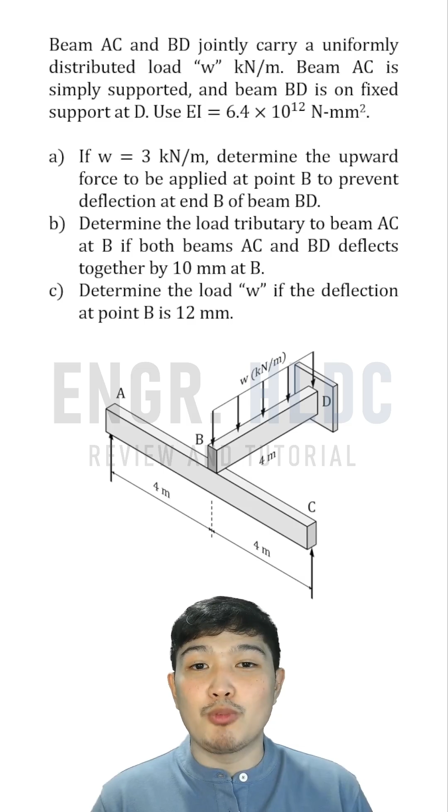The best way to analyze this is to first separate the two beams. Let's draw the free body diagram for each beam. First let us draw the simple beam ABC, and let us draw the cantilever beam BD.

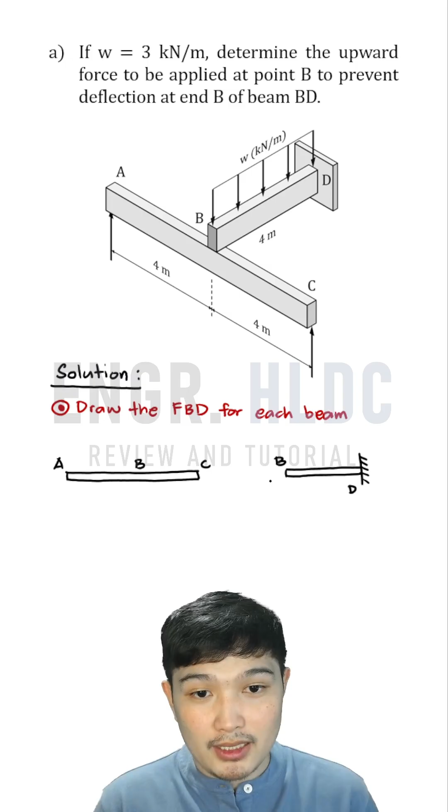Next, let us draw the loads and forces acting on each beam. Let's start with the beam on top, beam BD, which is acted upon by a uniformly distributed load W. At point B, since there is a point of contact between beam AC and beam BD, there will be an interaction force between the two beams.

Since we separated the beams, this force becomes exposed. So what happens here is, if BD were originally just a cantilever beam, point B would fall down. So beam ABC, at point B, will resist and push upward.

So we can place a force here going upward, let's call it RB. Also, since this is a fixed support, we expect three reactions: vertical force, horizontal force, and moment. I'll just show the vertical force and moment since there's no horizontal load on the beam, so there's no horizontal reaction.

Next, remember that this force, going up considering BD, will be transferred to point B considering the simply supported beam AC. The property is that when a load is transferred from one material to another, it has the same magnitude but opposite direction. So at B, the force on beam AC should be directed downward.

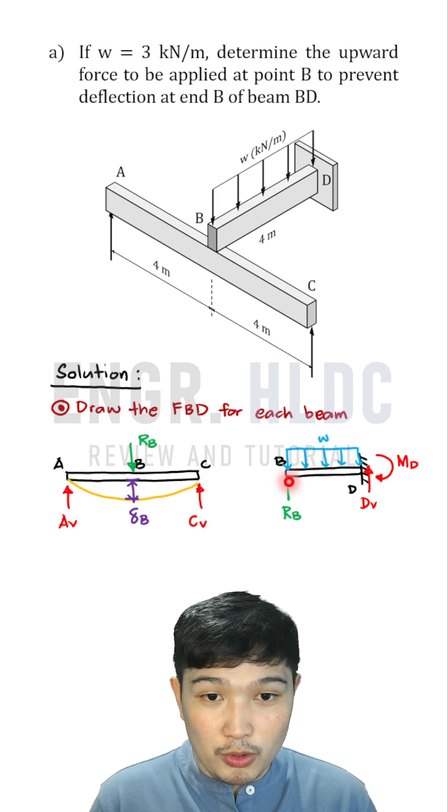For the cantilever beam BD, there is a downward and an upward force, so we may expect the elastic curve to look like this. Considering the same point B, this represents the deflection at B.

The first thing to understand is that since we're talking about the same point B, whatever is the deflection at B here should be the same as the deflection at B there. So let's relate them. Now the question is, how do we compute or calculate the deflection?

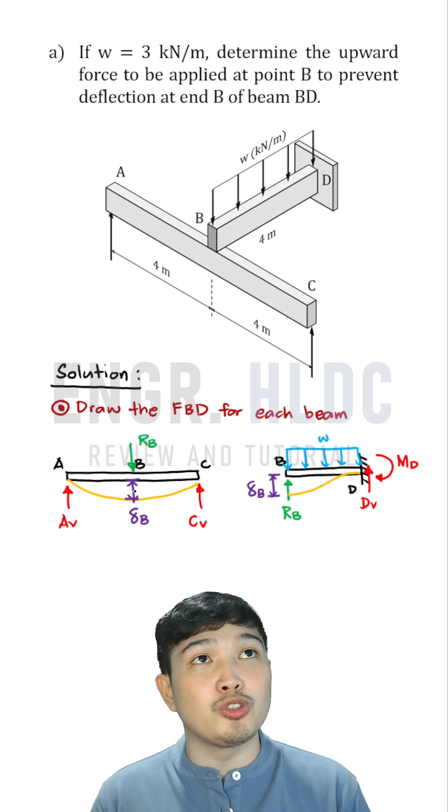So as you can see, the loads are very common: load at midspan, uniformly distributed load, load at the free end. For such cases, para hindi kayo magtagal sa board exam sa pag-solve ng ganitong problem, it is very important na meron kayong mga memorized na mga deflection formula. Memorize nyo dapat yung mga 4 basic load conditions. Recall natin yung mga kilala nating mga deflection formula.

For a simply supported beam, na loadan natin sa gitna, say for example loaded by load P, ito yung ina-assume natin na kanyang deflected shape. Usually na tinatanong ay maximum deflection, and maximum deflection occurs at the midspan. Remember, the deflection at the midspan may be calculated as the value of P multiplied by the length of the simple beam cubed over 48 EI. Memoryado na natin dapat yan.

So what else? Cantilever beam, dapat may mga memoryado ka ring mga formula for cantilever beam. Una, cantilever beam na loaded uniformly by load W, we can expect na magiging ganito ang kanyang deflected shape. Usual na tinatanong dito is yung deflection sa free end kasi siya yung maximum, siya yung critical. Remember, deflection at the free end in a cantilever beam loaded with uniformly distributed load is WL raised to 4 over 8 EI. Ito naman po yung memoryado nating formula.

Another thing, usual din ito na halos ganitong load condition talaga yung lumalabas sa board exam is a cantilever loaded at the free end with a concentrated load P. Almost ganito rin po yung shape niya. Itatanong din, what is the value of the deflection at the free end? For such case naman, ito naman po ang formula: deflection at the free end would be PL cubed over 3 EI.

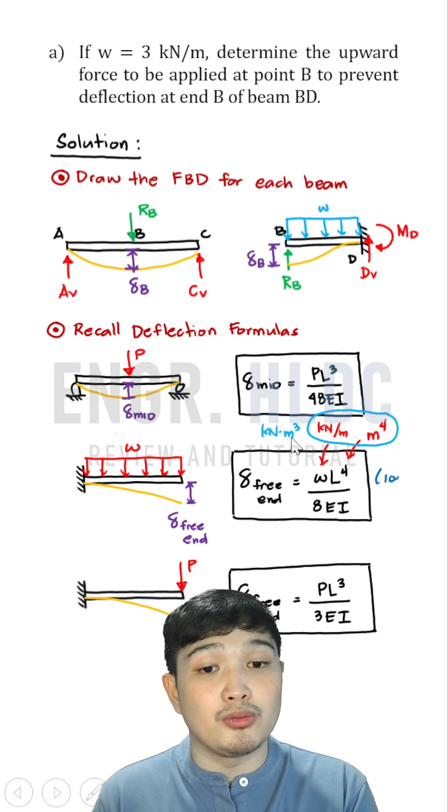Also, dito naman, kapag uniformly distributed load W, usually naka-kilonewton per meter tayo dito, and then yung length in meters. Kung raised to 4, meters raised to 4. Kung kinombine, kilonewton meter cubed. Same lang nung kanina: yung kilonewton to convert to newtons times 1,000, cubic meters para maging millimeters cubed times 1,000 cubed. So basically parang may multiplier kayo ulit sa numerator as 1,000 raised to 4 para yung end unit ng deflection would be in millimeters.

Okay, so apply na natin. May memoryado tayong mga deflection formula, apply natin dito una sa beam ABC. Therefore, the deflection at B for beam AC may be represented as PL cubed over 48 EI. Yung P natin would be represented by RB, yung length natin would be represented, of course, by the length of beam AC. Lagay natin ng subscript, and then cubed, and then over 48, and then EI.

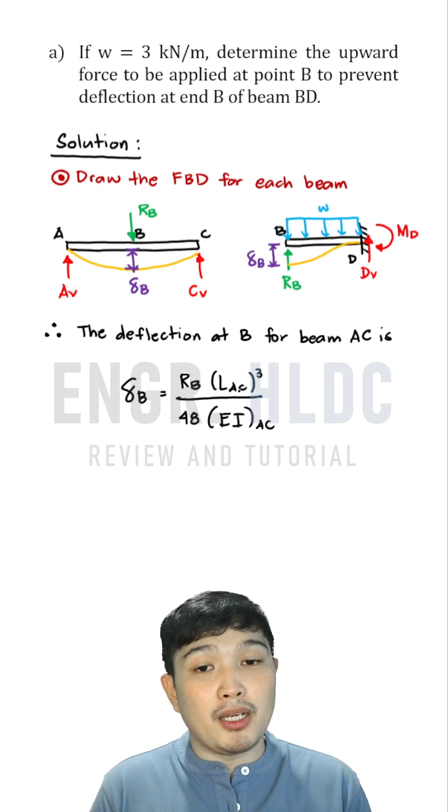Remember class, kung anong beam ang pinag-uusapan, doon din kukunin yung mga properties. So yung EI should be EI for member AC. Yun na, may formula na tayo for the deflection at B considering beam AC. So how about naman for the deflection at B considering naman yung beam BD?

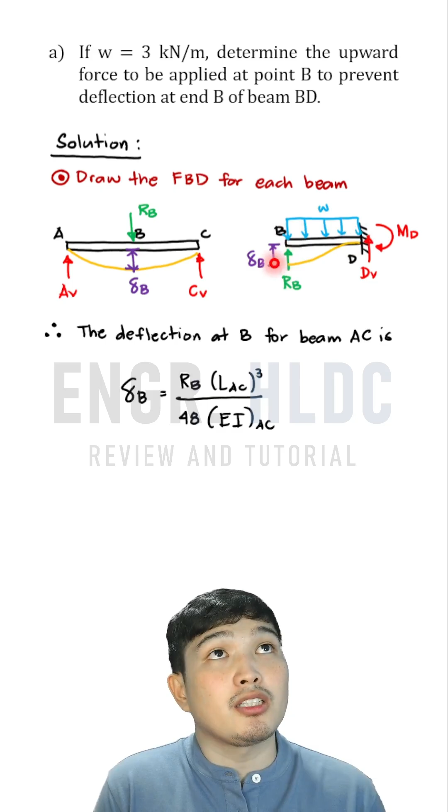Ang dami ng load dyan, no? May distributed, tapos may concentrated load pa. So sa mga ganyang instances, ang pwede naman natin gawin is apply natin ang superposition method.

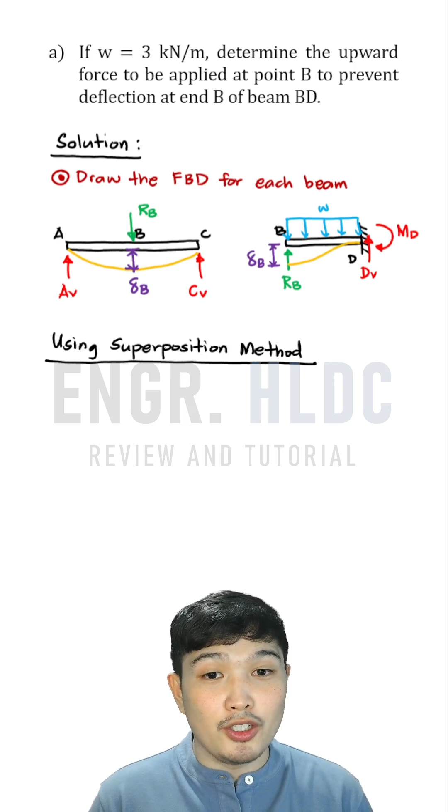So ano po ba yung sinasabi class ng superposition method? Sabi po ng superposition method is that the total deflection at a certain point on a beam may be calculated as the sum of the deflection on the same point caused by the individual loads acting separately.

Ibig sabihin, yung total deflection at A is the sum of the deflection at A considering load 1 plus the deflection at A considering load 2. Okay, yun po yung superposition method.

So applying it sa ating beam BD, okay, considering the combination of the distributed load and the upward concentrated load at the free end, pwede siya i-treat as cantilever beam acted upon by a distributed load, plus a cantilever beam acted upon by a concentrated load at the free end.

Alright? Or, we may write deflection at B, total deflection at B, as the sum of the deflection at B considering load 1, plus the deflection at B considering load 2.

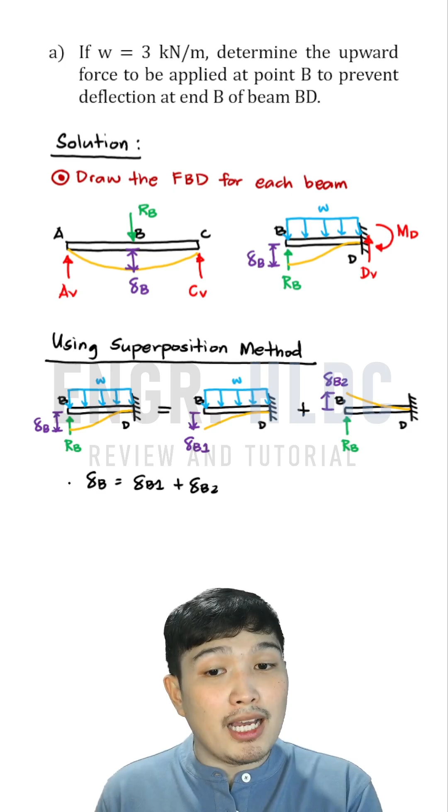Ngayon, remember, pag nag-a-add po tayo, so we have to consider direction. Okay, for a reason na yung deflection kasi, pwede siyang mag-deflect downward, pwedeng mag-deflect upward. Just like yung scenario po natin dito.

So since dito sa previous na ito, sa simply supported beam, ang ginawa natin, downward load will create a downward deflection and ginamit natin doon positive value. So to be consistent, ganoon na lang din dito class. For this beam BD, downward also is considered positive.

Okay. So ayan, therefore the deflection at B for beam BD may be written as, so considering this first figure, anong formula dito at the free end? So that is WL raised to 4 over 8EI.

So, lagay lang natin, making sure na yung length na gagamitin is yung length ng beam BD at yung EI ay yung EI ng beam BD.

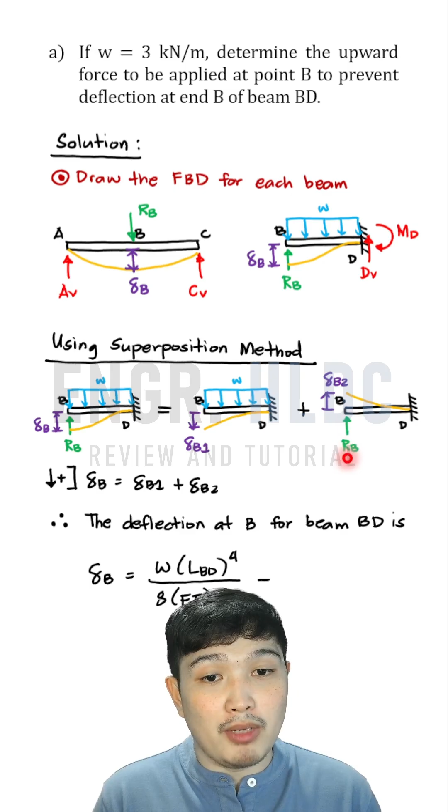Alright? Next, so since upward po dito, so it may be taken as kabawasan sa deflection. So, minus po siya. Okay, at ano yung formula for loaded at the free end? PL cube over 3EI. So, yung P natin would be represented by RB.

Alright? So, that should be something like this. Meron na tayong mga representation ng deflection at B. So, we may now proceed with our calculation.

So start tayo again. Sabi dito guys, for letter A, if W is 3 kN per meter, determine the upward force to be applied at point B to prevent deflection at end B of beam BD.

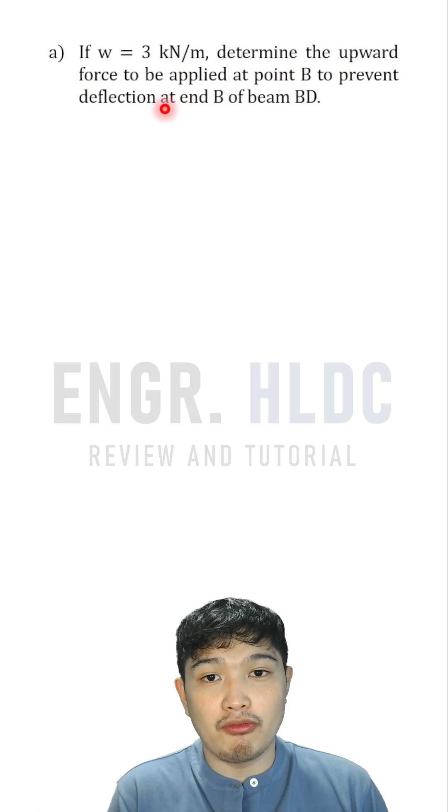So lista muna natin guys yung mga given. We are given with the magnitude nung uniformly distributed load. At binanggit din class na ipe-prevent yung deflection at B. So it means deflection at B should be set to 0.

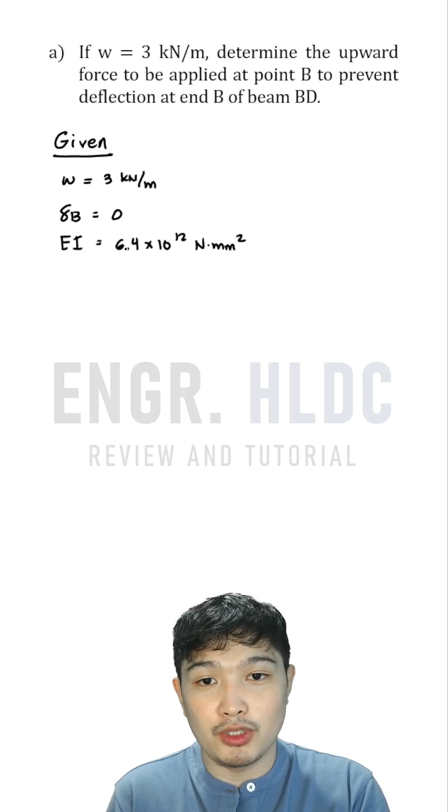At do not forget yung initial na given kanina, yung flexural rigidity nung beam po natin na 6.4 times 10 raised to 12 Newton millimeter squared.

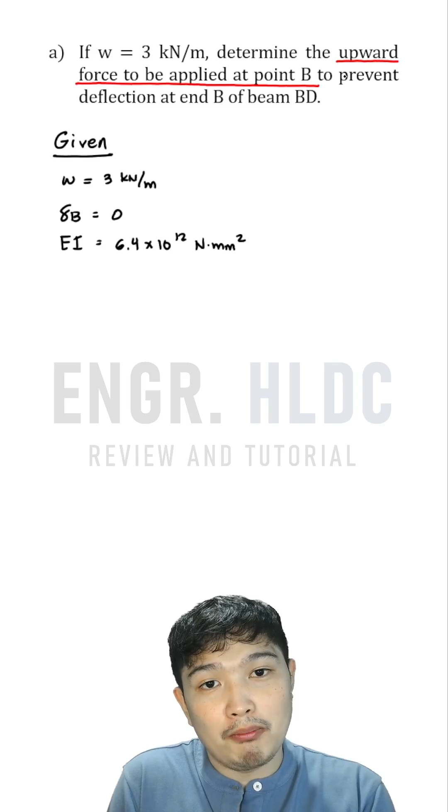Okay, so ang tanong dito guys, ano yung hinahanap? So i-highlight natin class, upward force to be applied at point B. Ano yung upward force po na iyon? So imaginein muna natin class yung initial na mangyayari pag nag-load tayo ng W.

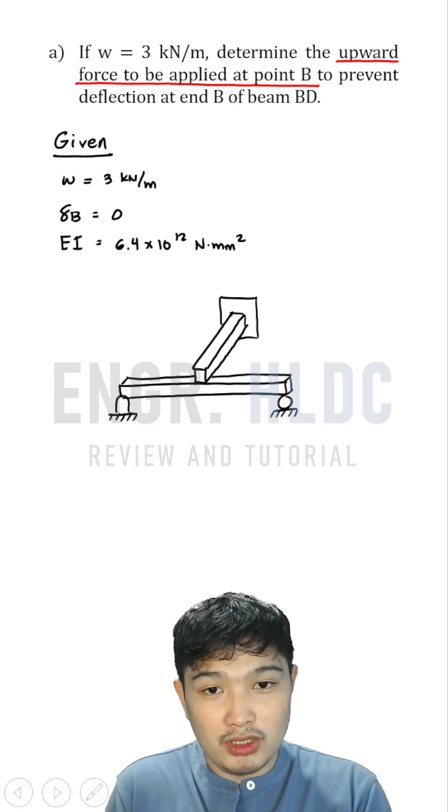So for example, this is our beam BD, the cantilever beam BD, and this is the simply supported beam AC. Initially, let's load it with a uniformly distributed load W. Naturally, since there's a load, the cantilever beam will deflect downward, and then the simply supported beam will follow. Something like that.

So at B, this is the deflection at B. Based on the problem, we need to prevent this deflection. So how can we prevent this deflection at B? There are several ways to eliminate the deflection at B. First way, there should be no load W, since the deflection only happened because of the load. But of course, that's not realistic since the magnitude of W is given.

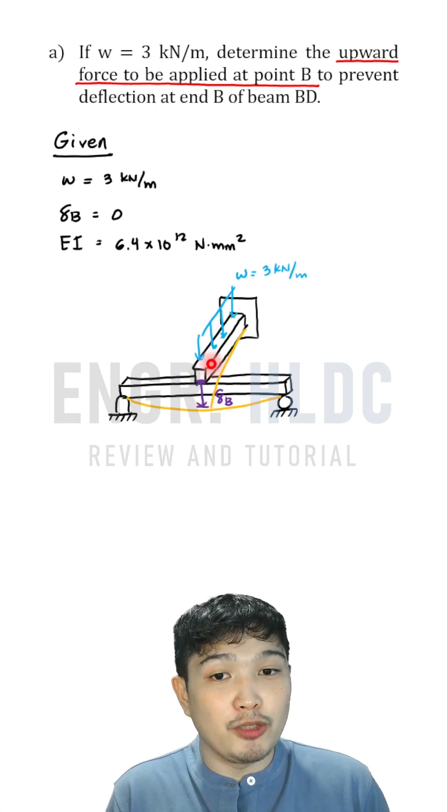So what is the most realistic way to prevent the deflection at B? That is, we apply a counter force to the deflection. We apply an upward force, let's call it P, exactly at B, pushing it upward to prevent the deflection that occurred.

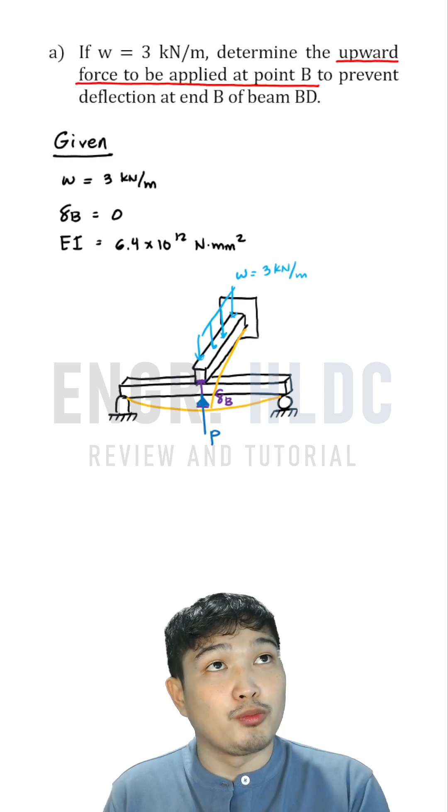So for this question letter A, we now have an additional force P compared to our initial calculation earlier and the formulas we derived for the deflection at B. Remember, this is our figure from earlier, P is not yet present here. Now, what difference will it make if we place P in the middle?

This means for the simply supported beam, our forces will change since we now have P. But for the cantilever beam, since P doesn't directly act on it, we won't see P here since P is only applied at the bottom of the simply supported beam AC. Our purpose is to eliminate the deflection at B, so this becomes the deformed shape, or the elastic curve.

So basically it should become like this, a horizontal line. And then for cantilever beam BD, it should be lifted back up like this, making sure the deflection at B is 0. So to solve for this P, we can only see it in the simply supported beam, so we have to analyze the simply supported beam.

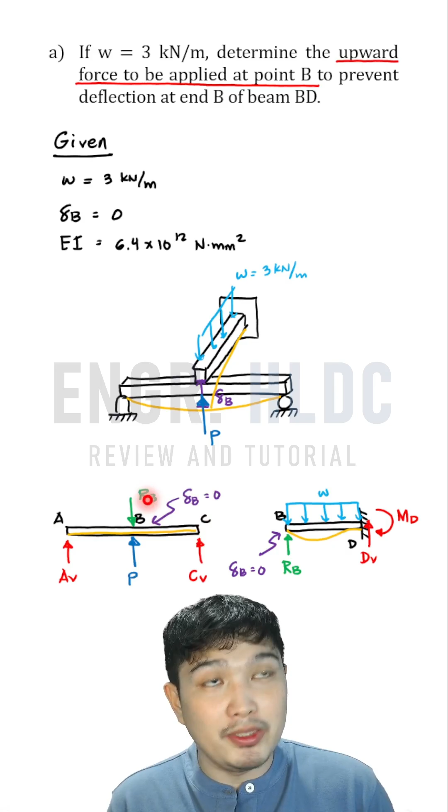However, we do not have the value of RB yet. So what we can do is solve for RB first using this figure on the right. We need to find how much RB is required so that the deflection at B becomes zero, using the equation we developed earlier for the deflection at B, which is this.

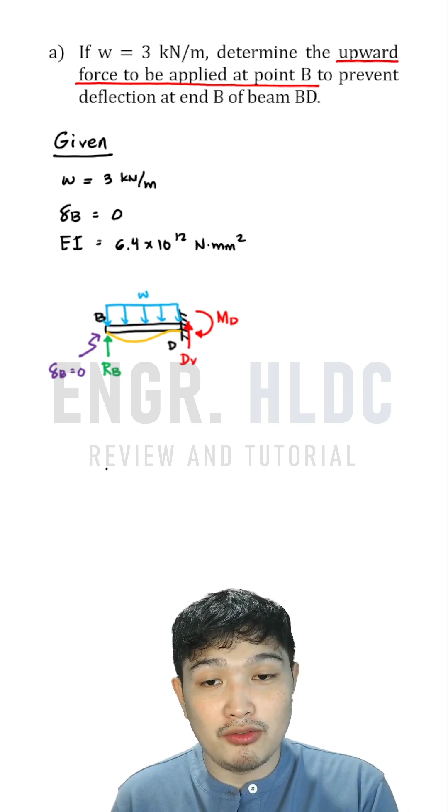Then we simply plug in the given values. First, deflection at B is 0. Next, W amounting to 3 kN per meter. The length of beam BD, which is 4 meters, and don't forget the multiplier of 1,000 raised to 4. For RB, that's our unknown, let's say it's in kilonewtons, and again length of BD is 4 meters. We can also place EI in the denominator, but what I'll do instead...

is multiply both sides by EI, so we can cancel the EI in the denominator, and on the left hand side, EI times 0 is 0. To simplify further, divide both sides by 1,000 raised to 4, so the left hand side remains 0, and the right hand side cancels the 1,000 raised to 4. So we can simplify this as 0 equals 3 times 4 raised to 4 over 8, minus RB times 4 cubed over 3. So we can calculate RB as 4.5 kilonewton.

This is not yet the answer. This is just the interaction between the simply supported beam and the cantilever beam. So let's go to the simply supported beam now. We already have RB here, so now what, sir? Do I need to analyze it again? Not quite, actually.

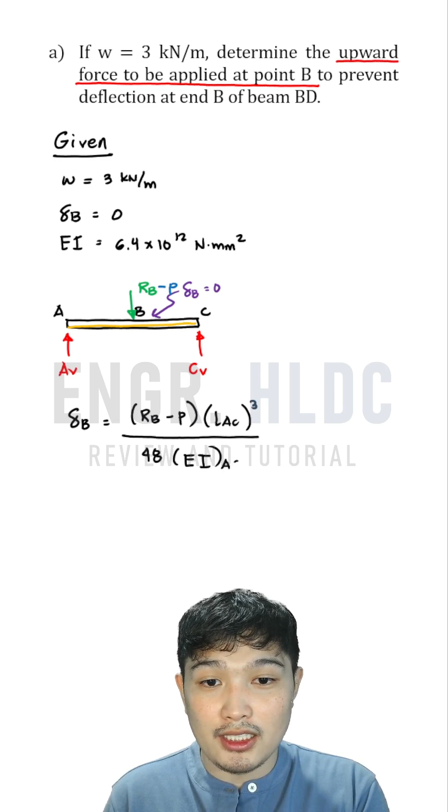So deflection at B is 0. RB we can put as 4.5, and P is unknown. Length of AC, do not forget, is 8, with a multiplier of 1,000 raised to 4. EI, let's put that too: 6.4 times 10 raised to 12. Solving for P, you may use your calculator and the answer should be 4.5 kilonewtons.

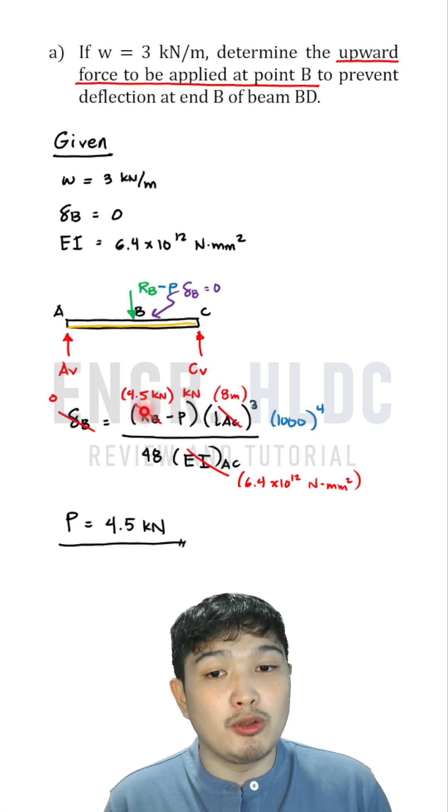Notice, class, you can easily see that P here becomes equal to RB. Because notice this denominator, you can cross multiply it to the 0, so it becomes 0 as well. Then this 8 cubed and the 1,000 raised to 4 can be brought down to the denominator of the left side, so basically it becomes 0. So what's left is 0 equals RB minus P. That means P is equal to RB.

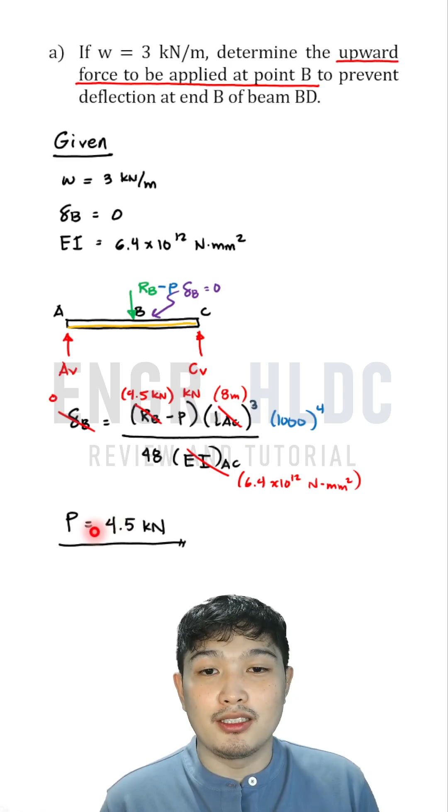Alright, okay, next, letter B. The question asks: determine the load tributary to beam AC at B. So basically, class, what is resting on beam AC at point B? That is again RB, given that beam AC and BD both deflect 10 mm at B.

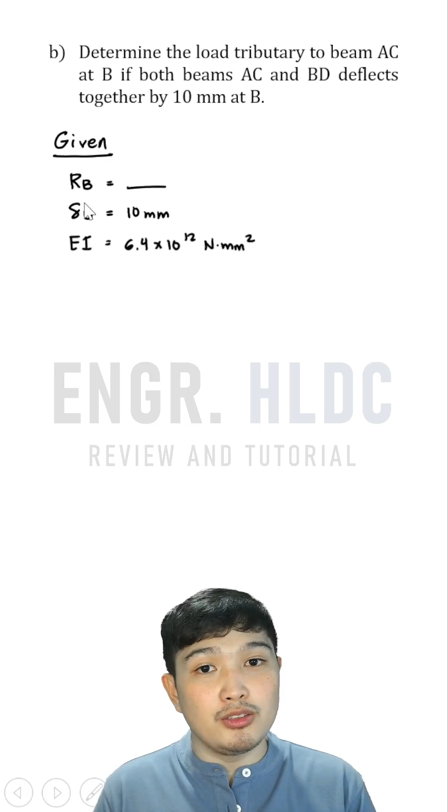So from there, we can say the unknown is RB. We have deflection at B of 10 mm, and don't forget the EI given earlier of 6.4 times 10 raised to 12. So RB is what we're solving for, and the focus here, class, is the simple beam AC, using the formula we derived earlier for the deflection at B for beam AC.

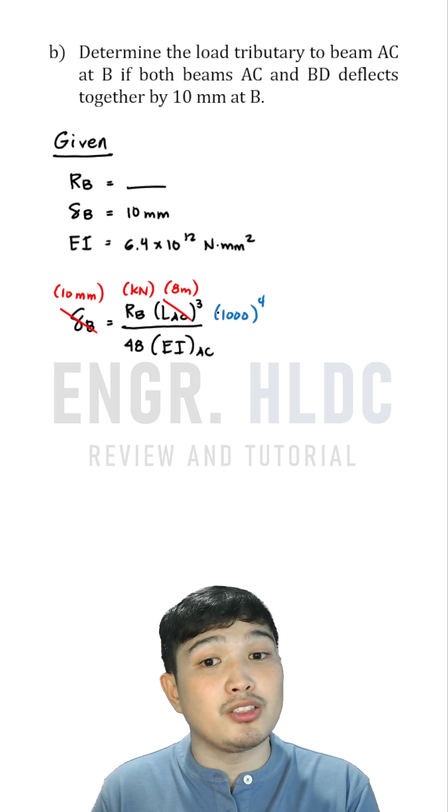So simply substitute: 10 mm, this in kilonewtons, this is the length of AC — don't make a mistake, it's 8 meters — then the multiplier of 1,000 raised to 4. Here we need to write EI since it won't cancel out. So simply use the given parameters and we can easily calculate RB as 6 kilonewtons.

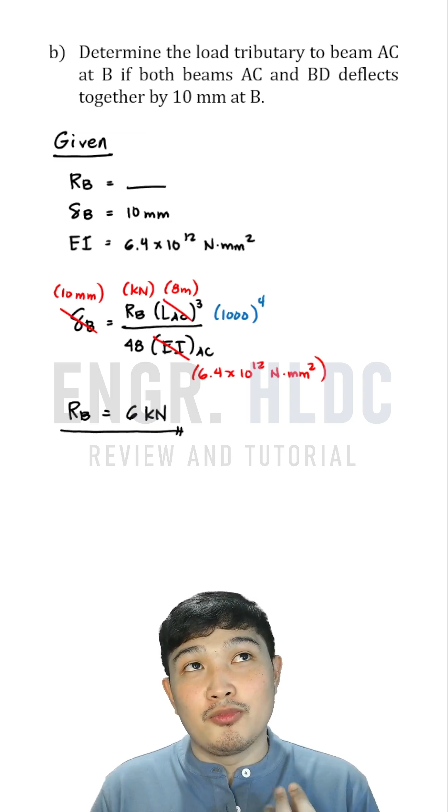Okay, next: determine the load W if the deflection at B is 12 mm. So what's given? We're looking for W, but the provided deflection at B should be 12 mm. Again, don't forget the EI given. For W, we'll use the derived formula for the cantilever beam BD, which is this.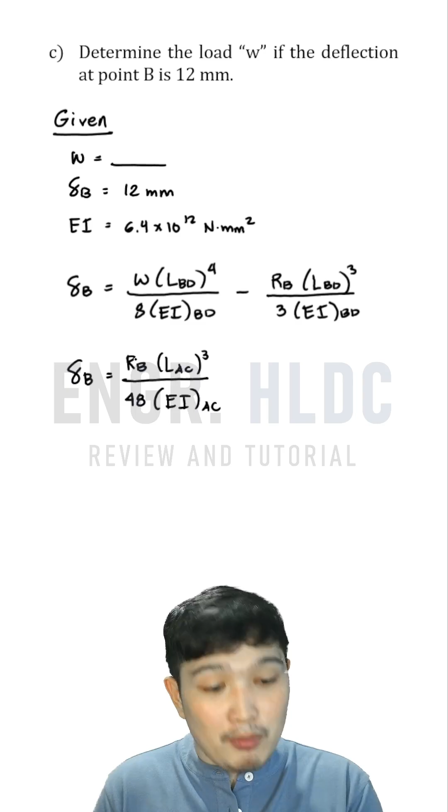So what we do first is solve for the required value of RB here, so that it deflects by 12 mm. Just substitute again like what we did before, and we can solve for RB. So for it to deflect 12 mm, the force at point B should amount to 7.2 kilonewtons.

Okay, and then after that, substitute that into the longer equation, so W is the only unknown left. And there you have it: W would be 7.2 kilonewtons per meter. And that should be it.